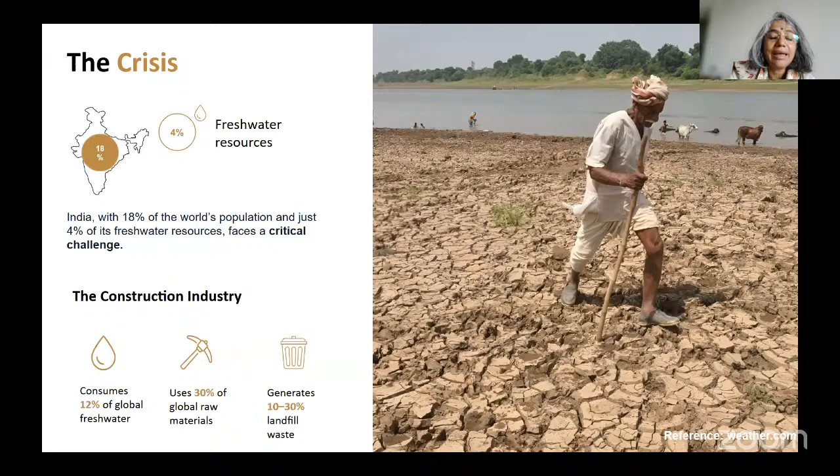So this was the scenario under which the entries were called for under the Design and Build grants. This whole project was put together where we've identified 5 grantees who are going to actually execute projects. You'll be happy to know that some of them are colleges of architecture who will actually use this project to also teach and learn. We also have the mentorship program where we've got requests from these mentors to be guided on certain specific aspects of sustainability. And that's the journey we are really kicking off today.

The grantees are receiving, for the D&B grants, between 70,000 to a lakh of rupees, which is not really too much when you look at the larger problem, but this could be a seed to bring about larger change. It could be that block from which they can leap forward to do much more.

CoolAnt architect Monish Siripurapu was the second juror. I wouldn't call them jury really, it was an interview panel, a conversation that we had with the applicants to understand their intent, their ability, and to execute the project. Monish and his studio are known for their quirky innovations in the field of sustainability, and that's the need of the hour, to understand how we did things and how we can do things today. Also, Sumit, who's the head of CSR at Mphasis F1 Foundation, joined the panel.

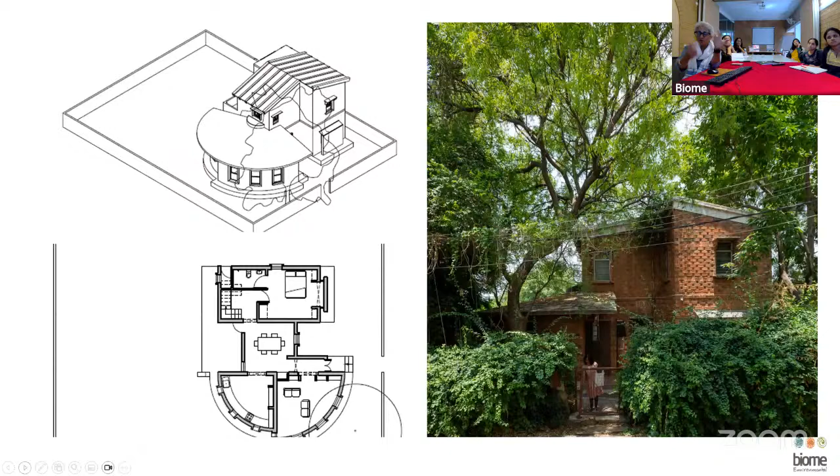So these were most of the homes. You use the rat trap bond, but then fill up the space in between to make this red and white checkerboard, like what we see mostly in Kerala architecture, but more for getting skylights within, because that's how the light comes. Filler slab - well, the tiles were replaced with waste, whatever was available.

So all the time we are also looking at waste in the building process, as well as whether the building can be a waste sink. Arches replace beams - as much arches as possible, as little concrete, as little steel in the design.

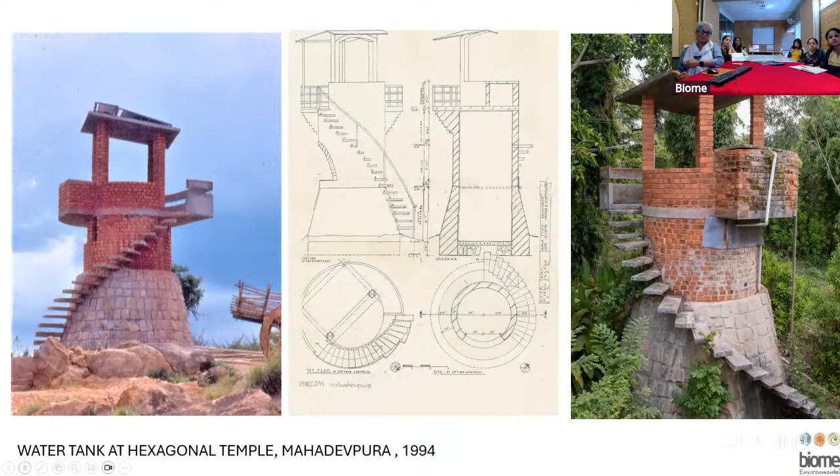Onto this is a water tank, again done sometime in the 1990s, and when we go and look at it in 2022, it's still there. This is for a farm - a tank below for the garden and agriculture purpose, a tank above to provide for a little building on the side, with solar panels at that time itself, which were working to lift up the water so that you get it by gravity into the building next door.

I just love the drawing, handmade drawings. There was no generator, so we couldn't have done anything with the railings. At that time there was no railing, and even now they haven't added a railing to the staircase.

Sanssouci is our home, which we built in 1995. That's one of the first buildings we did with earth sourced from the site. And it became what we call a lab of ideas because we did a lot of experimentation.

What we'd like to bring forth here is that, as such, concrete, exposed brick, plaster surfaces, you had something to refer to as good architecture, as something which is available, you learn from it. But when we started, we didn't have that.

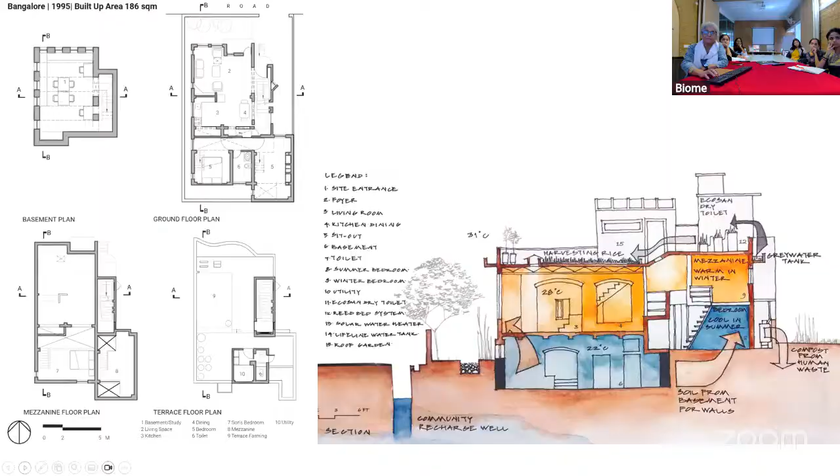That's our basement. Doesn't have the best of light, and also I would say sometimes the ventilation. And we combined it with a mezzanine, so the sleeping spaces are for cool nights.

But in 2008, we decided to move from being a proprietary firm to a private limited. And so people who were there at that time for a long time working with us became shareholders in the office. And since we were working by 2008 a lot on water, and in all our designs water and sanitation was an integral part of the design, we decided no longer should we be calling ourselves by somebody's name. And Biome fits the bill in terms of the name.

And the practice is rooted in Bangalore and its contingencies. It's much better weather-wise, but there are lots of challenges, and those challenges are our opportunities for design. So it revolves around these three contingencies: resources to build with, water, and sanitation.

And how did this come about? Resources to build with - okay, you've checked it by making a basement and getting the earth, or somehow or other get the earth and you build with that, because Bangalore soil is extremely amenable to building with earth because it has less clay.

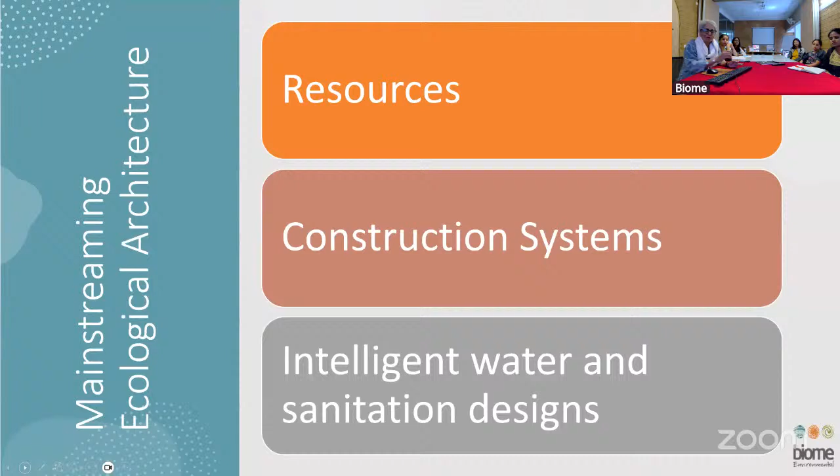So we were always interested that let's mainstream it. It required that we decide on what kind of resources we need, the construction systems, learning much from the Indian Institute of Science in Bangalore about construction, and then design for water and sanitation.

So the resources - these are the three resources we're looking at. You all largely know us that when we build with earth, we work with a lot of waste too, but we've also built with concrete and laterite, though very few. Maybe we've done about 1,000 projects, so maybe 2 are all concrete, and maybe 3 are all laterite.

So contextual application - what is right. Basically nothing is wrong, but how do you use a certain material in a certain context? So I'll show some examples of it.

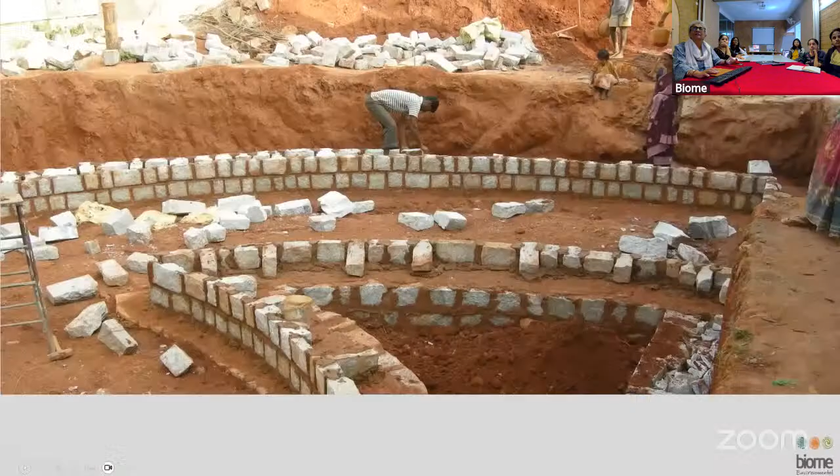So when you're looking at earth as a material, for us it's either a basement, or in larger projects, look at the water reservoirs. So basements are like this. Here in Bangalore, we use stone, granite stone with stabilized mortar.

Stabilized mortar is mortar which has a bit of cement, basically earth and quarry dust, with about 5 to 8% cement. This is so much better than cement and sand mortar, because it retains the moisture. So the curing required is less, and the cement gains strength slowly and in a better way, and doesn't get honeycombs.

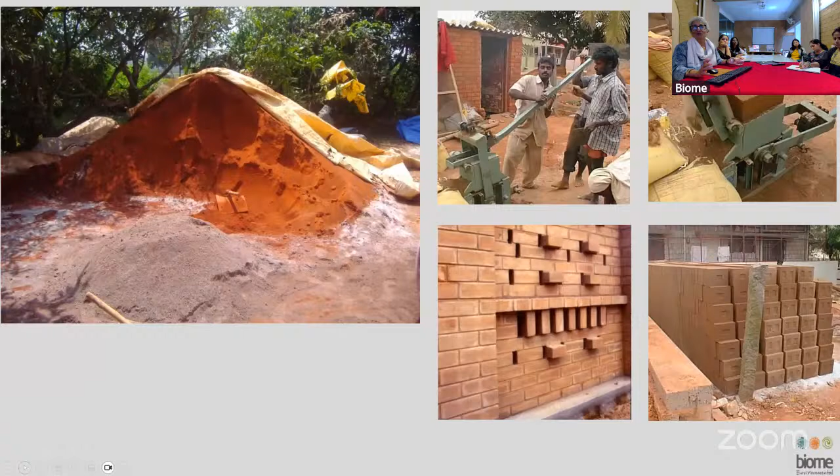So this is the kind of soil which we get in Bangalore. I'm always looking at it—wherever we go, we're looking at soil. What is it like? What is the characteristic of it? It's mixed with quarry dust, and the percentage of cement is decided by how big the building is.

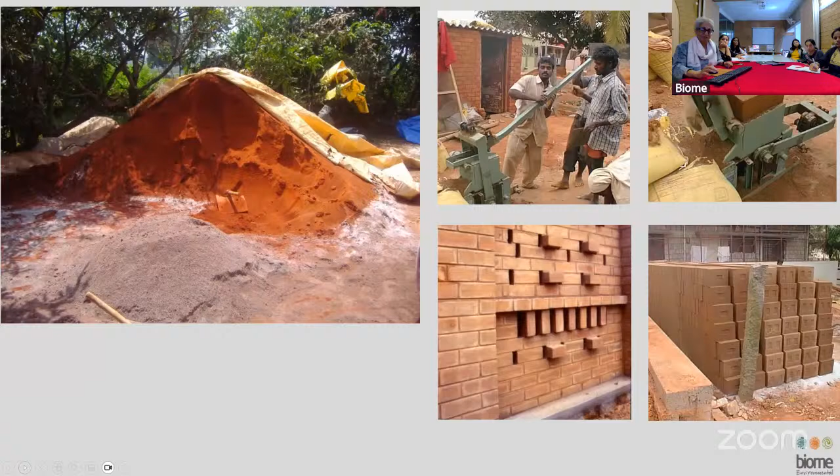Pressed at the side, human labor, and the block comes out, cured in the sun, and that's it—that's how the walls are made. And then the whole building itself is looked at as an ecosystem.

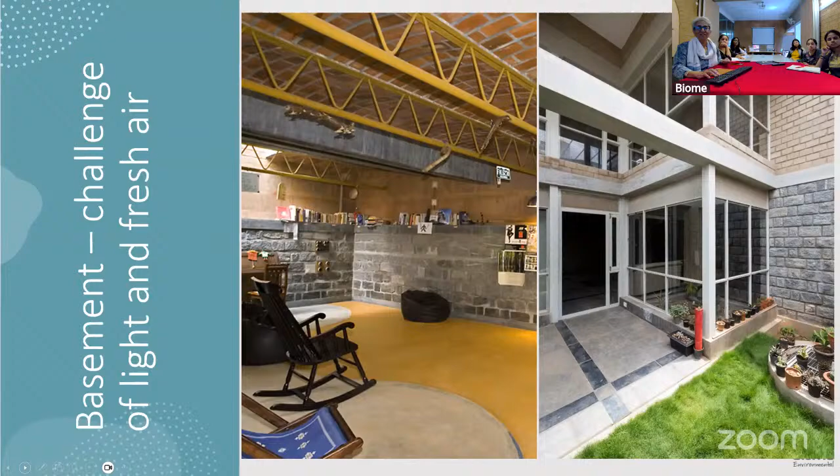So the basement became better. They started having skylights and even a garden, a well in this case. So better air, better light, and more earth. And they get used for many different purposes. One of them is, I have about 3 projects where they are dance studios.

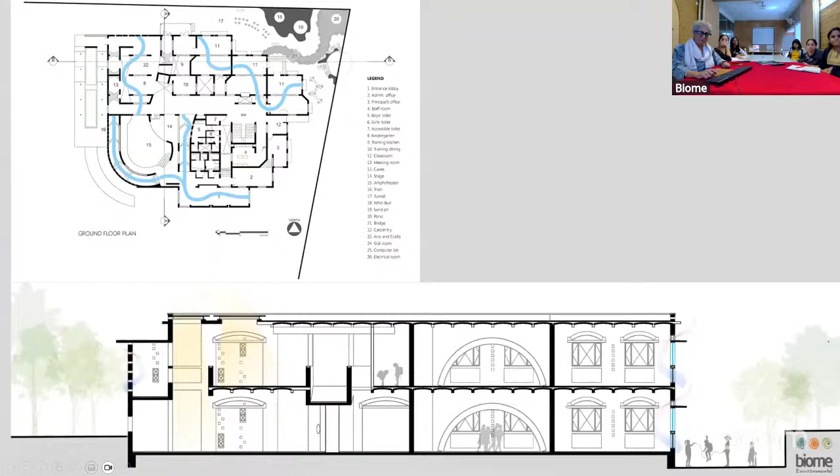In this school in Coimbatore, it's what I call the mother of all basements. The school itself goes down by 1.5 meters. You see it in this—there's a road here on the left, and even the playground is 1.5 meters below. The bylaws do not allow making basements in a school, so why not make the ground itself underground, so the classrooms don't become basements.

And we get a lot of earth then, to build the whole school of about 18,000 square feet, the compound walls, even for the next phase blocks were available.

Mind you, it doesn't take too long because while the blocks are being made, there are parallel processes happening—the blocks are made while the foundation is on. In this case, we also used a precast system of roofing, so the roof is being made while the walls are coming up. This whole school of 20,000 square feet was finished in 8 months.

And with lots of fun spaces inside. Again, with respect to the climate, the inside is also a play space—so they're not merely passages, they're more than passages. Classrooms are designed for light, which is above, and children sit on the floor, so air passes over the body—jalis below.

In a larger project, which was about 3 lakh square feet of construction in 80 acres of land, it was not only that we had to build. While in this 80 acres earlier there were about 35 to 40 people staying, with the students when they come to the school, about 300—this would accommodate 3,000, and now it accommodates 3,000 people every weekend.

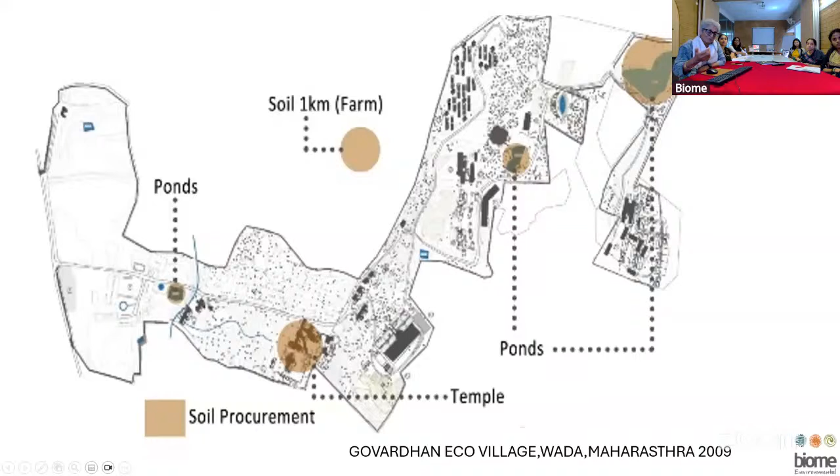So we did a hydrogeological study and made ponds, and they became the resource—they became the quarries for the soil to be used. That's about a 100 feet by 100 feet pond, which is in fact a recharge structure. So the rainwater coming down from the hills comes to the pond and recharges the ground.

Through the hydrogeological mapping, we also noticed where we could get the discharge, and we have a well there from where water is collected and used for all drinking and cooking purposes. This is the building—this is a picture taken after 11 years. This is near Mumbai, a place called Palghar.

Composite climate—it rains about 3 to 4,000 mm in 3 months, so the design had to really take care of the walls. And then it's hot, it goes up to 45 degrees centigrade. The winters are moderate, going down to maybe 8 degrees. Everything had to be accounted for.

So we created these rooms which will have a terrace, which are roofed, which are used for daytime usages. This is for ISKCON, so bhajan, meeting with any of the saints—all that happens at the terraces. And you don't even use the fan during the daytime.

Now this becomes designed by law. Even when they try to design by themselves, they never put a terrace. They went for a terrace and realized that you cannot manage the rains with an open terrace, so it's best that you cover the terrace. So now every building they do is in this manner, and you get an extra space for use.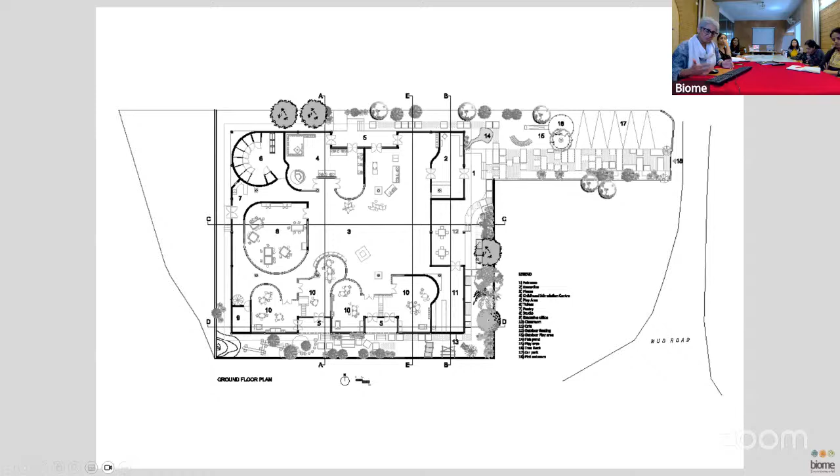This project, Atelier, the school, when they came to us, they had the land only for 5 years as lease. So we discussed with them and decided we should make a building which you can take apart and none of it will be wasted.

To retain the earth within the plinth, we've used what we get in Bangalore as stone chapri, so it retains it. External facade is made of glass, wood, aluminium, and earth blocks. Internally, everything is MS structures. It's a false ceiling of bamboo and roofing of GI.

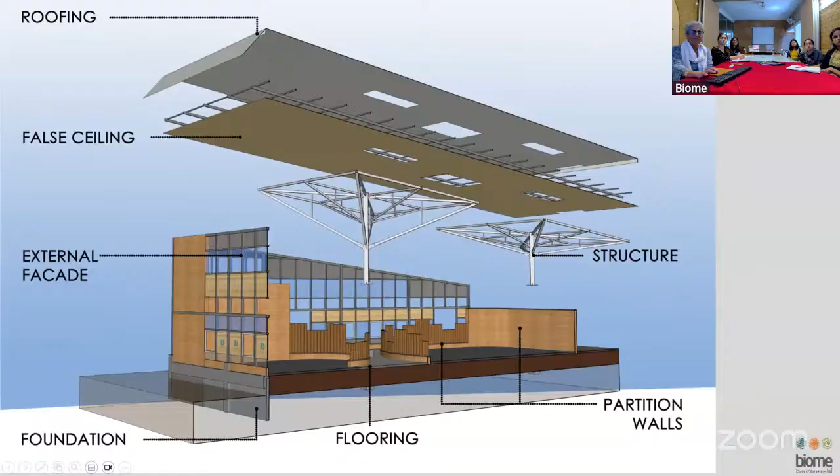Everything can be taken apart and reused completely, including the flooring, which is paver blocks on corridors. So you can even remove the flooring. Nothing gets wasted in this whole building when the use is over. It's about 20 years now, they're still using the building, so whenever the lease expires.

To go further with the idea of waste, we used repurposed rubber wood for all the furniture and some of the other wooden shelvings and staircase, but the rest of it was paper. Paper as divisions for walls, paper for furniture.

So the waste is not merely the building's waste. When we occupy, we generate waste. And I think we really love to look at this aspect in our designs.

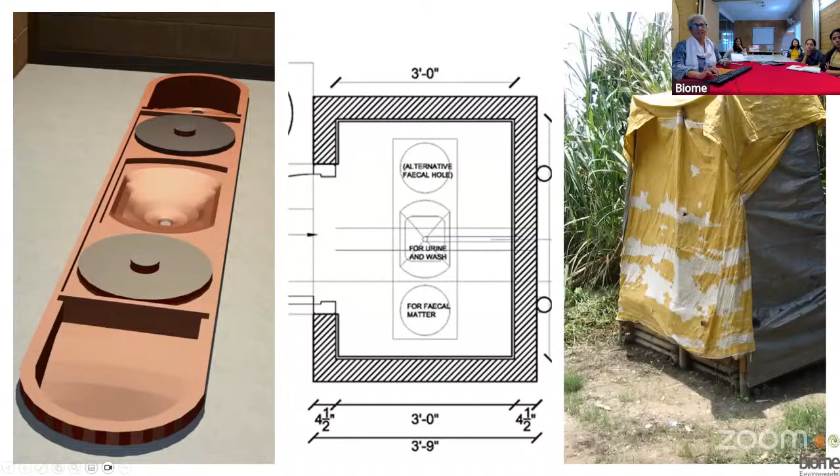And so we have the glory of having designed a WC pan for Indians. This is in use in Kosi villages in Bihar, where Kosi floods a lot and you need a toilet which is not sitting in the ground and which is not throwing its waste into the ground, so that it doesn't go into the water. So now in Bihar and Jharkhand, they call this toilet Phaydemand Shauchalay, which means it is a profitable toilet.

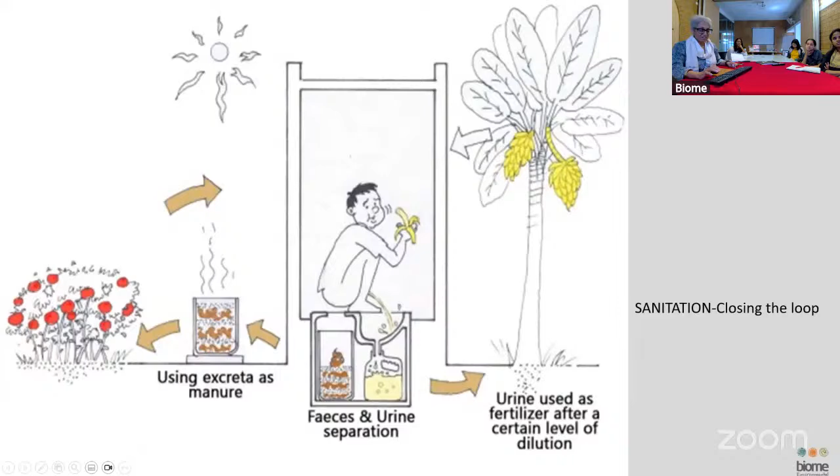So this is what we do. We just separate the waste which is coming from human beings and use it for fertilizer and as soil.

This is a project the clients call Eco House, for a professor from Stockholm Environment Institute and director of Karnataka Pollution Control Board. So the whole idea is how do we close the loop. The blue column which you're seeing are various kinds of toilets and kitchen where black and gray water will be produced.

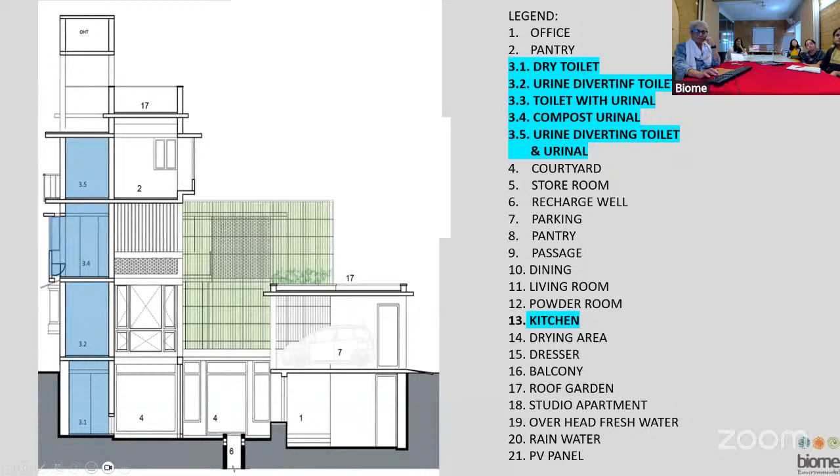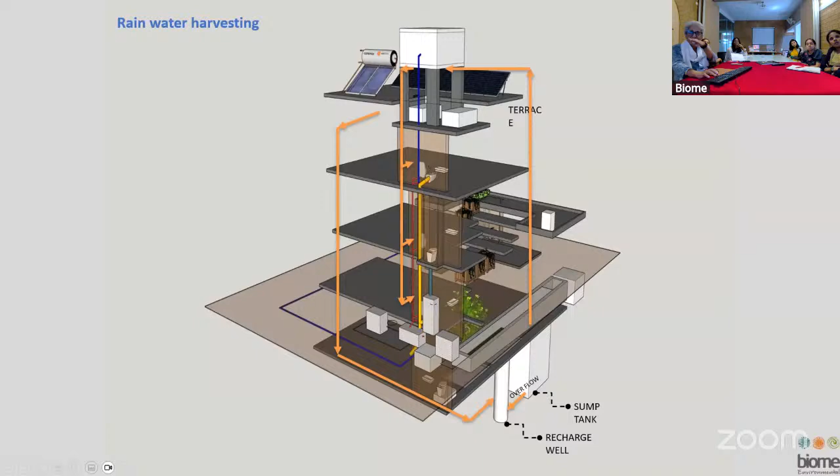So the whole drawing and the interaction with the client was on how are we going to put all the various pipes and other systems. He was bringing some systems from Sweden too. So it starts with rainwater harvesting, and it goes into the underground tank and then goes to the recharge well.

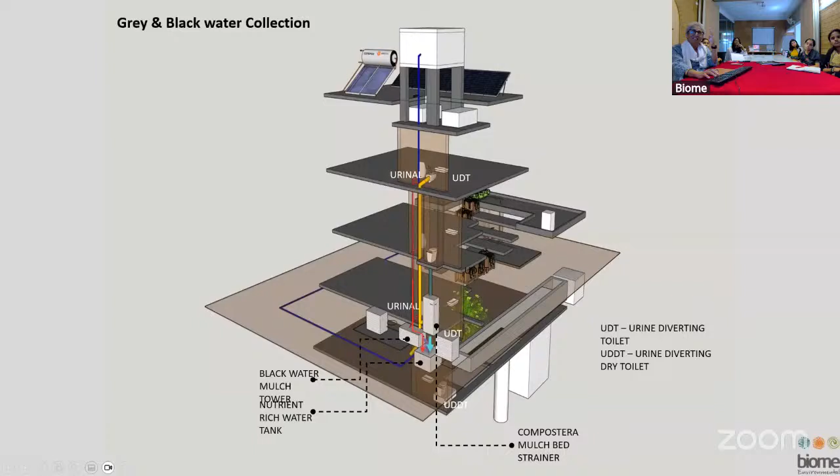Then you look at how do you treat the grey water, various systems for that. Then the grey and black water collection, there's mulch, and the whole of it is now covered with green, growing food within the place. We had an underground space and we got the earth from there for the construction of the building, and the basement is used as an office.

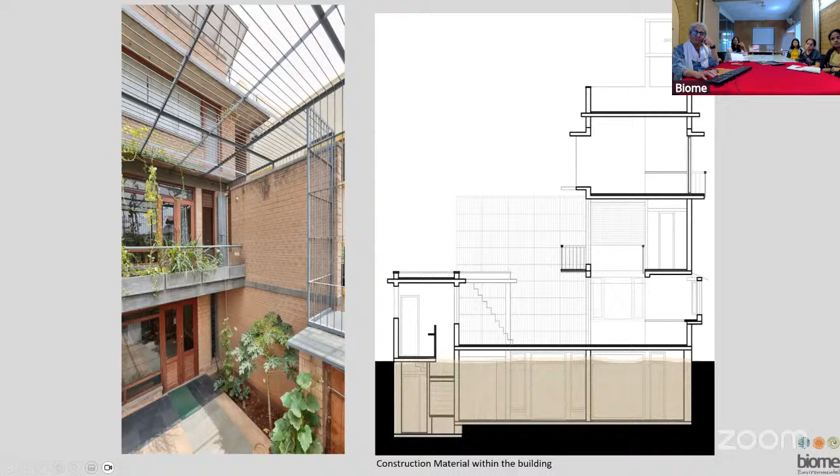Contextually, we're agile. This is in Coorg. The locals know how to build with laterite. First of all, getting the soil is difficult. Making the blocks will be very difficult because you have to have flat land. This was part of the building which was existing - we broke it down and got some of the laterite blocks from there and then added. So it's built with laterite, but has the courtyard so as to allow for light and ventilation well within.

Or this is in steep lands in Coonoor. It is impossible to think of building with earth. Tamil Nadu doesn't even allow you to transport earth from one place to another. Again, with almost 35, 40 degree slopes, it was difficult to have flat land available to make earth blocks or store. So it was easier to build with concrete.

But then how do you design so that it's not just merely a concrete block? What we had to work most on was how do we reduce digging into the soil, because that will contribute to landslides. So in the building, at the bottom is a foundation plus a sump tank.

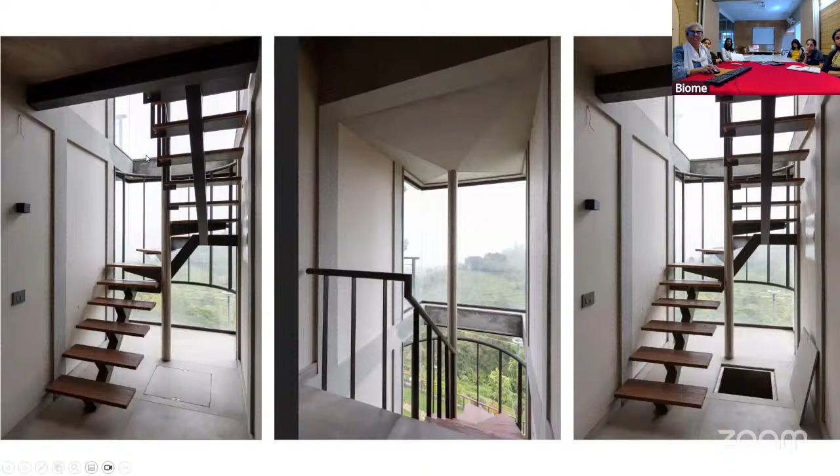Even more interesting is the sump tank is at the floor level, you can see it here, it's at this level. This opens up, and that's where the pipe brings the rainwater down. The roof is sloped in such a manner that all the rainwater comes through this and goes into the sump tank.

And you keep the interiors to a bare minimum. You show the concrete as it is. It's a beautiful interior done by Kavita Kohli of K2 from Delhi.

You manage the water in the land to create spaces.

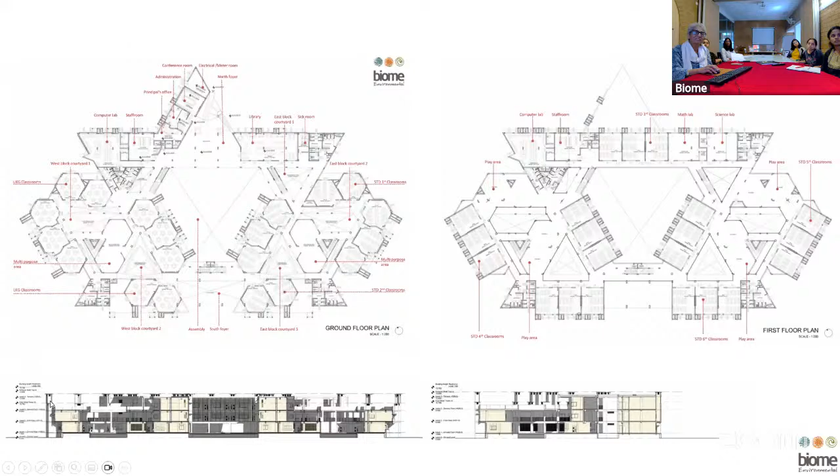What happens when you have to build in a very hot area? This is near Hampi in Toranagallu, a school for JSW. The air quality is not very good because this school is next to the steel plant. So what we decided, my colleague Sharad decided, was that we'll take better quality air from higher levels. So we have vents that created stack effects, giving both inward and outward going air through these stacks.

They're not as tall as ideally they should be, but our colleagues designed it so that they will work. We painted them black. On top, we really wanted everything, the exhaust, to be black, but the colors the school chose are different. So I love to show it in black and white so you can see how it should be.

Now we have better quality air and cooler air within, and this is interspersed with lots of small shaded courtyards. Further, it's also important that we make drawings right.

This is again a plot in Tadoba, which used to get flooded. The idea was to raise up the buildings and the pathways where we're going to build, but not allow the water to go and flood the neighboring fields. So we have to embrace the water. We created a large pond where all the water in the rainy season comes. We got the earth to build, and we are not adding to the woes of the neighboring plots.

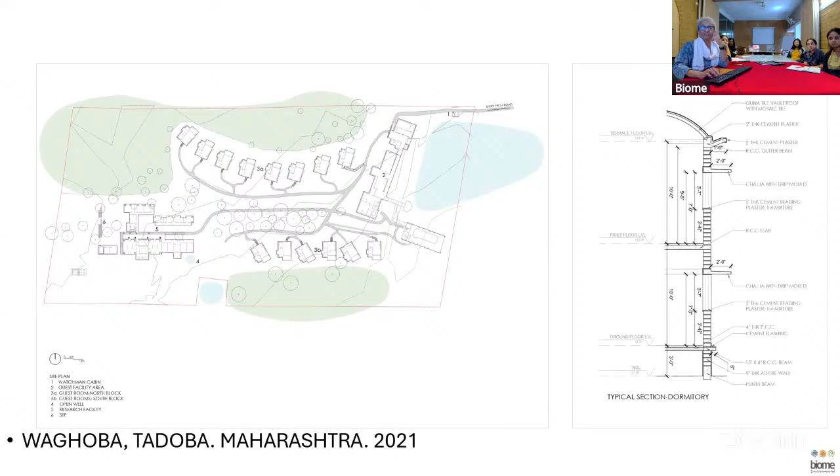We make drawings in a way that anybody can read and build, because we're not always working with highly trained contractors. We're working with locals, so it's important that the drawings speak. This is the resort, the water body.

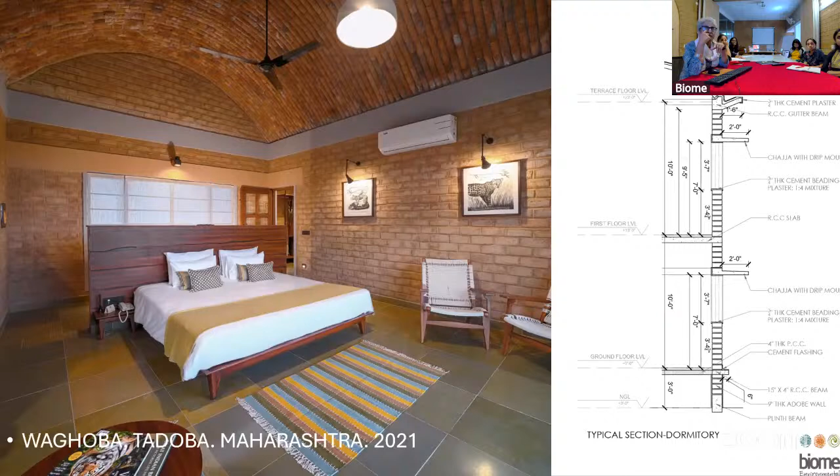And that's how it's built inside, with adobe and stone. The roof is with Guna tiles from Center for Science and Villages. So also in India, there are lots of small institutes which have been working for a long time on different ideas, and it's nice to collaborate and work with them.

But what is the construction system? One thing is to just be at the site, learn, and also train. So this is an exchange. And research again at the site to find out what different materials are possible.

So like in Bhopal, where it's black cotton soil, we get the soil tested, go to various places, and then we found somebody who's making fly ash blocks that he was ready to make, combining earth, fly ash, sand, and cement into blocks. So you have to do a lot of research, a lot of legwork is required.

How do you make site drawings that make it possible to execute at the site without you being there? We've been developing software. We do our own estimates because these are construction systems which were not there earlier, so we don't have CPWD or PWD rates.

And then, like I said earlier, we really like to keep control on costs, so monitoring is essential. The office has between 2 to 3 quantity surveyors working in the office, or we also link to them.

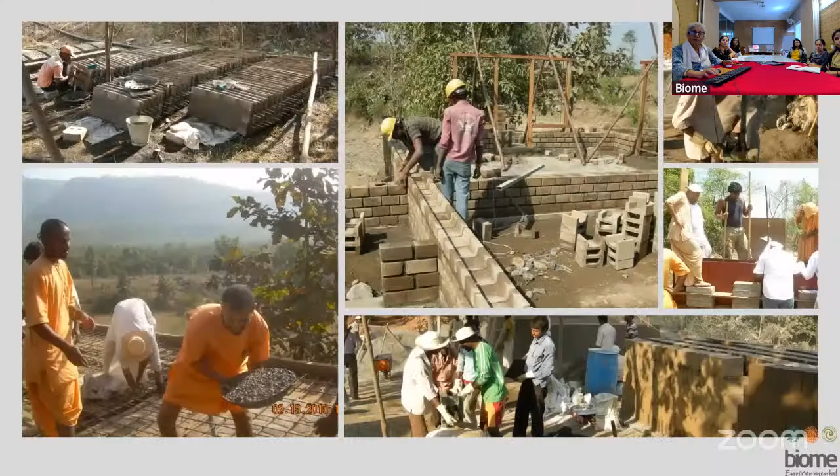This is pictures at Govardhan Eco Village in Palghar, where we used earth for everything, including the roofing panels, because we had so much earth. And this is an earthquake-prone region, so creating even sill bands, being at the site, working with the devotees as well as with workers, training them.

But also we took for the first building a team from Bangalore, because the idea was that the first building has to be very good. People should like it and they should be building more and learning from it.

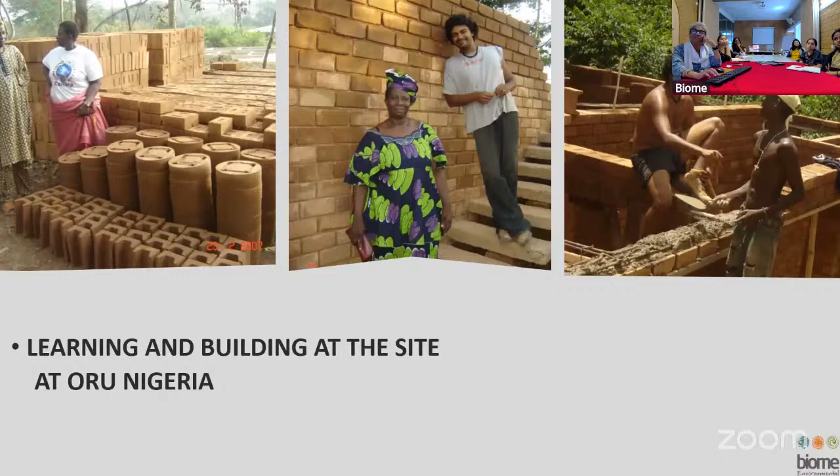You have to really do the drawings well, where you know exactly that when you do the 19th course, that's where the lintel has to come, so it doesn't move here and there. You give them that, and that's it. You do a good drawing, and the masons are able to follow through.

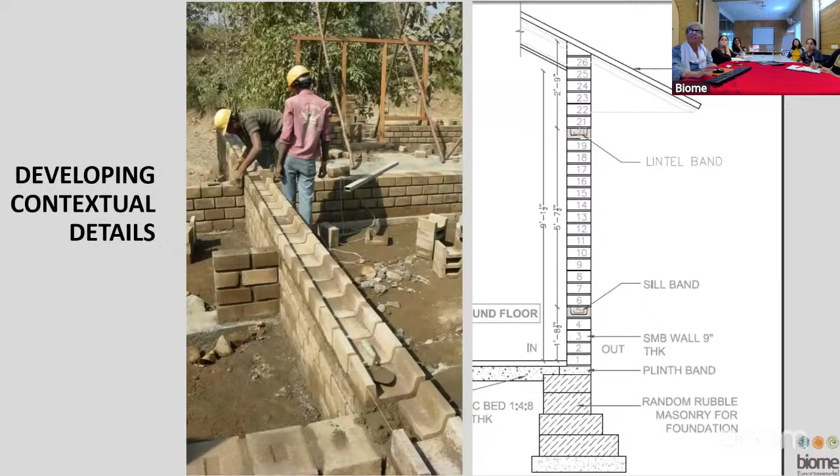Sometimes it's just a small addition. This is in Madhya Pradesh, an addition of a room in a homestay. This is Madhya Pradesh Tourism Board's initiative for tourism, so that you would have a nice room and a toilet, and urban dwellers can stay with the villagers.

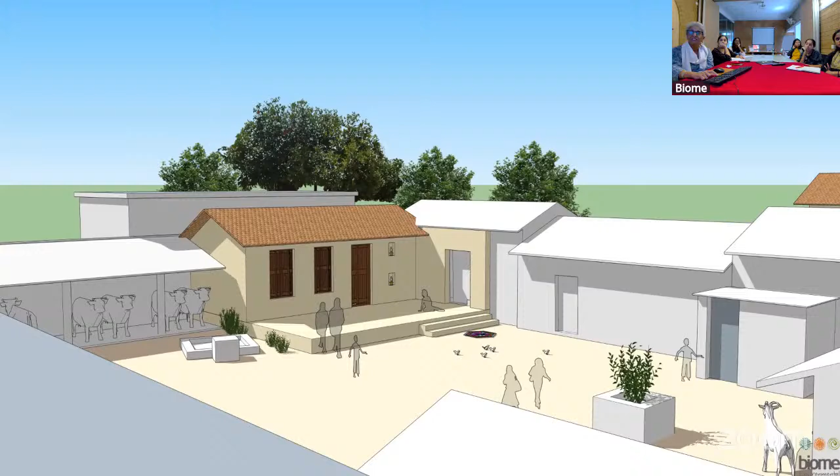You make the drawings in the local language. Till now we've done mostly drawings in Devanagari, because we haven't had the chance in other places where they needed Tamil or Malayalam. Here it is.

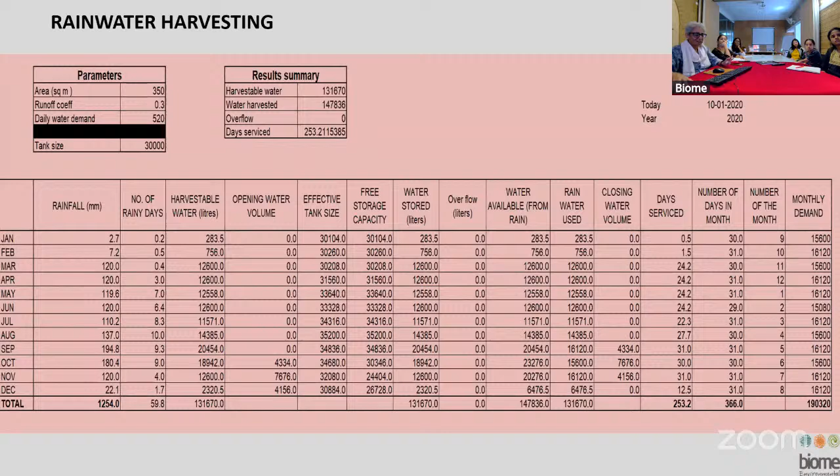We've worked out rates through rate analysis. The quantification is done in the office, and through the project there is always monitoring. The bills happen, and we get to know where it's going up or down. We've also made our own software to calculate the capacity of treated water and the capacity of the tank. You put in the lat-long of the place, how many people, etc., and it gives you the optimum storage capacity. So you don't just build something out of your mind, but it is always worked out.

Contextual details of treating the grey water. This is part of the terrace design, where grey water is treated on the terrace. We make our own ferrocement tanks to put the planted filter bed, because our sites are small, so this treatment cannot happen on the ground. The terrace is a place where we get the maximum sun, so it's the best place to grow and treat wastewater, because the plants need the sun and good air.

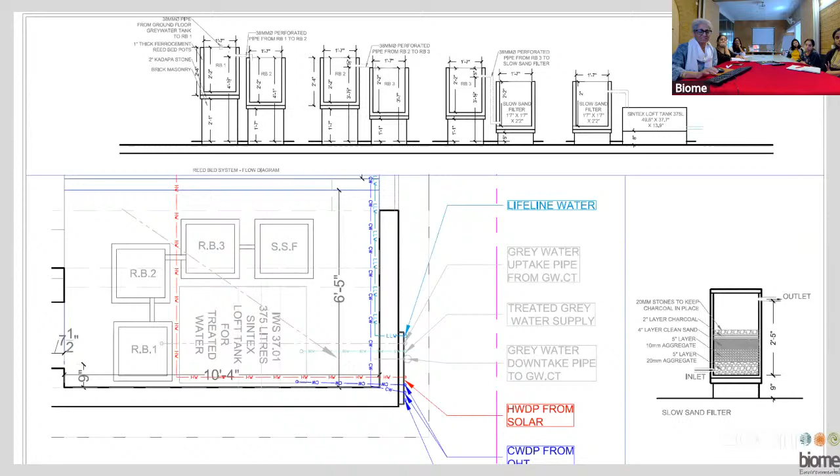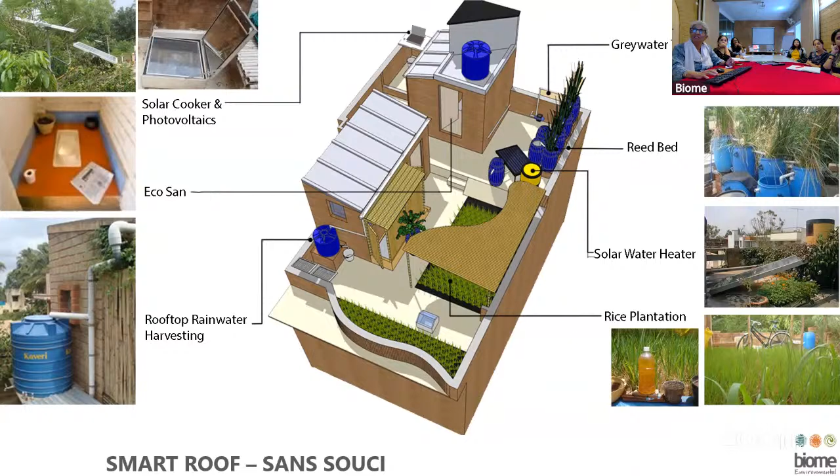So we call this a smart roof, where everything needed for you to function within the house is taken care of on your terrace. You treat your wastewater through the grey water treatment. You have an eco-san toilet, so you get fertilizer and you grow your rice or vegetables. You get your soil as well as your fertilizer. You collect drinking water, which we call lifeline water, from the cleanest of the roofs. And obviously it would have everything to do with solar, whether solar photovoltaic, solar cooking, or solar water heating. We call this a smart roof.

That's the rice growing on the terrace, rice being harvested. This is how a terrace is properly designed in the office.

And we hope our cities would become ecosystems and not villains. So that's the office now, from 1 to 30 odd. And that's it. Thank you.

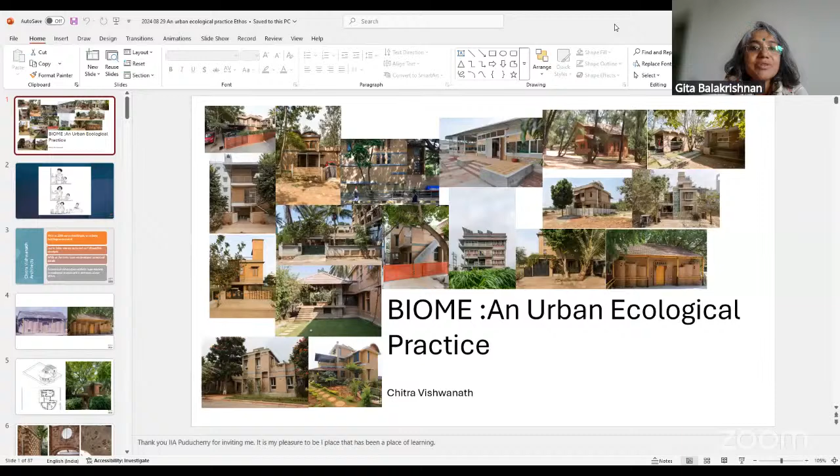Thanks, Chitra. That was quite revealing, I think, for many who haven't really seen this space of ecological design, and who are kind of finding their way around. It's interesting. It took me back in time where you were talking about Guna tiles and local technology that needs to also be looked at by many. Guna is just one example you gave. There are so many that people could integrate into their ways of building. We'll talk more on a lot of questions that I have, and I'm sure others will have as well.

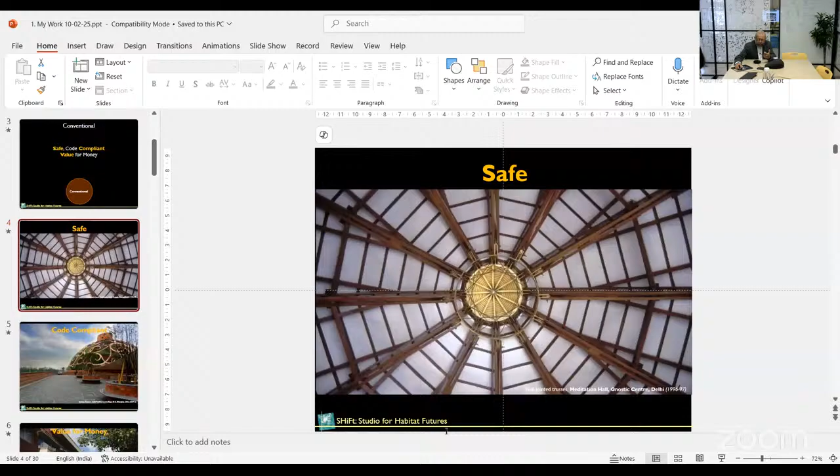Okay, so safety is an interesting thing. When I designed this truss, 12 trusses meeting at the center of a meditation hall in the Gnostic Center, which is a Sri Aurobindo center near Delhi.

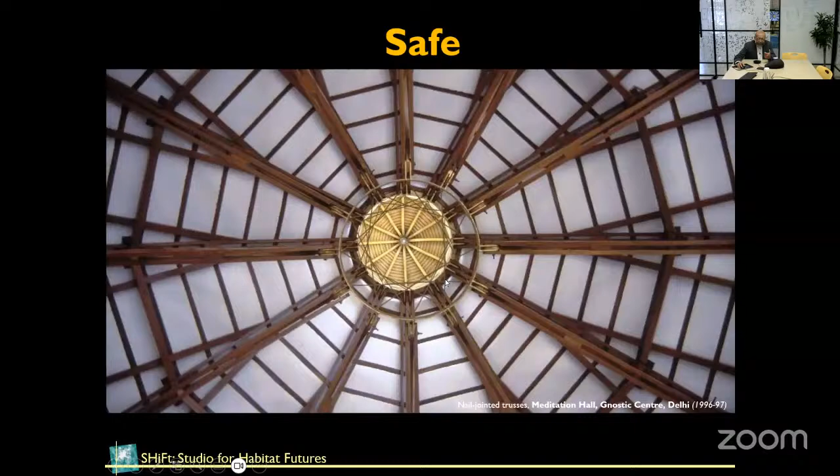I designed it completely by using a booklet published by the Forest Research Institute. Frankly, it was symmetrical because I could not handle the non-symmetry. So all 12 trusses met at a peak, and this was nail jointed timber trusses, meaning nails were put in alternating sequence, head first and tail first.

This was recently, after 20 years, renovated. The interesting thing is that with some ballies to hold up the roof, we managed to take down the truss, repair it, and put it back up again. So it shows that, like in Chitra's case, nothing got wasted. It was completely used.

Something similar happened in the Shanghai Pavilion that we did for the World Expo in 2010. Here we made the world's largest bamboo dome at that time, complete with herbs and medicinal plants on the roof.

Here, you can see my cursor? Yes, we can. Okay, so everything here that you see is not bedded in cement. For example, this flooring pattern is on sand.

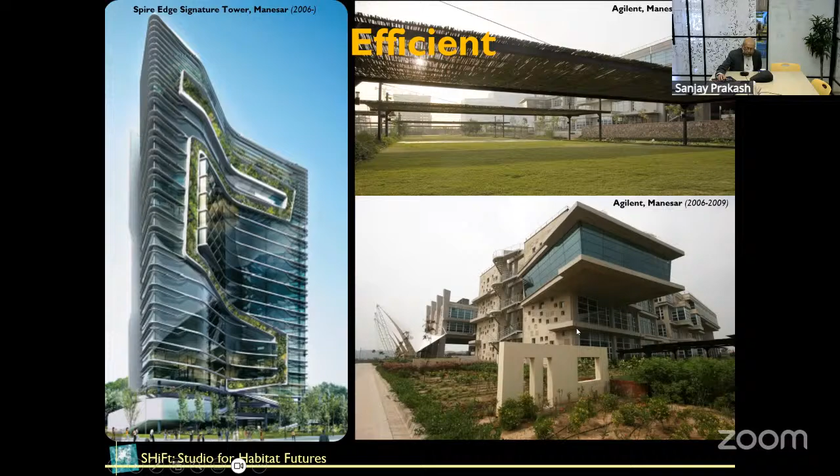And this is the bamboo dome from inside. You see the 40 trusses meeting at the middle. And on the right is the TZ housing in Bangalore, in Whitefield.

Okay, I was unfamiliar. I thought there was another picture appearing on the top left, which is blank.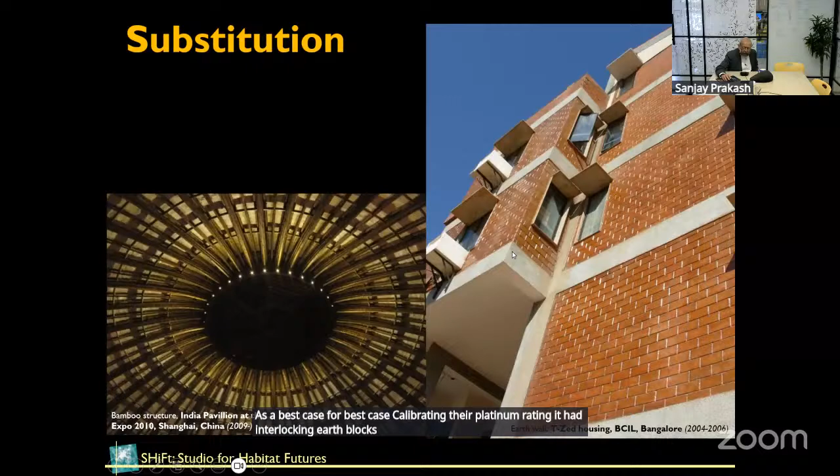So this project was used by IGBC as a test case for calibrating their platinum rating. It had interlocking earth blocks and mostly Silicon Valley returnees, and they were quite fond of it, and it's still being used even though it's now 20 years old.

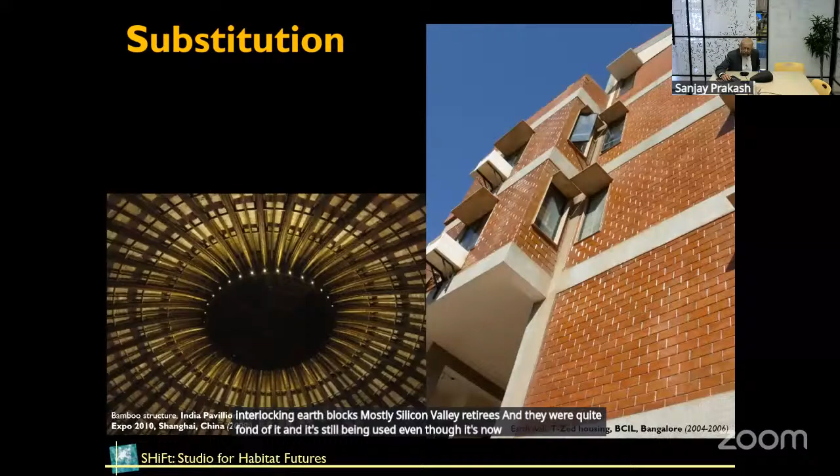This was 3 examples of substitution also, where this upper left house was Heine Muller's house in Pokhara, Nepal, and it was right on the epicenter of the earthquake. So 23 kilometers off Pokhara on the east, I think. And this withstood the earthquake well because it had hidden inside some steel and a lot of wood.

And this withstood the earthquake well. In fact, when the earthquake happened, I wrote to Heine and he replied after more than a week. And I was worrying what happened, because I was almost certain that the house would have broken down. But he answered that he was traveling and his wife was in the house. And now she is completely assured that it will definitely stand for another 100 years. So that was a good story.

Anyway, on the bottom left, you see Matighar, which was the compressed soil block building, which we did on the Central Vista. And on the right, you see something designed by Gernot Minke, the Pope of mud architecture in Germany. He designed this completely with unstabilized soil blocks because he wanted not to change the color.

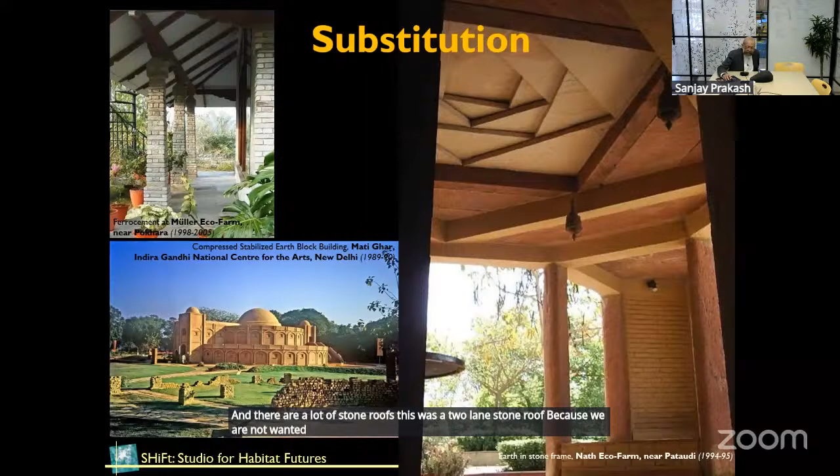And he designed this with a little bit of concrete. So there are some concrete beams and there are a lot of stone roofs. This was a 2-layered stone roof because Gernot wanted a certain ventilation system to be applied in this project. So this was the green aspect, and now there is sufficiency, which consists of 5 things. Sustainability, which I believe has not yet been addressed by either the LEED or GRIHA systems.

Sufficiency is one aspect, resilience is another, equity, identity, and carbon neutrality. Sufficiency basically asks the question: how much is enough? Is it enough to want 20 or 18 degrees and 16 degrees, and allow workers to sweat in the heat? Resilience consists of whether any project can withstand future shocks, such as heat waves, dust storms, or excessive rain. Equity, on the other hand, consists of: does someone get excluded?

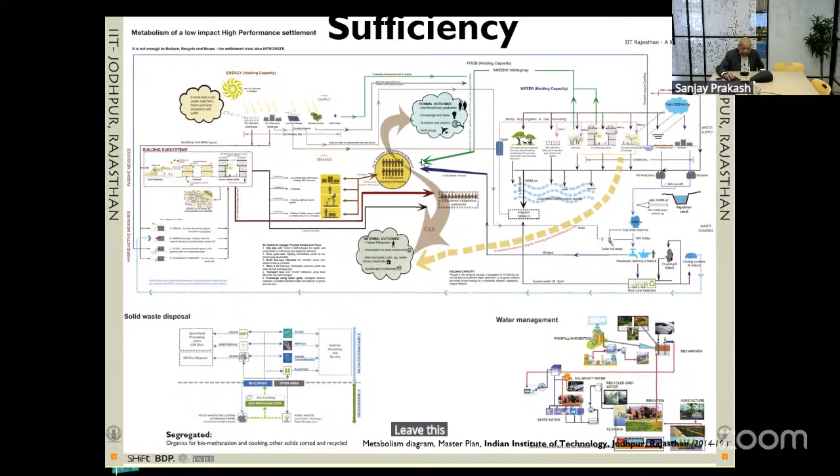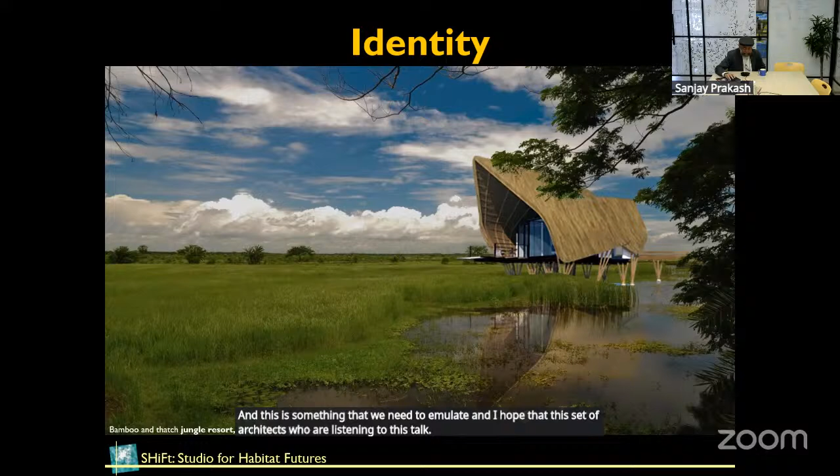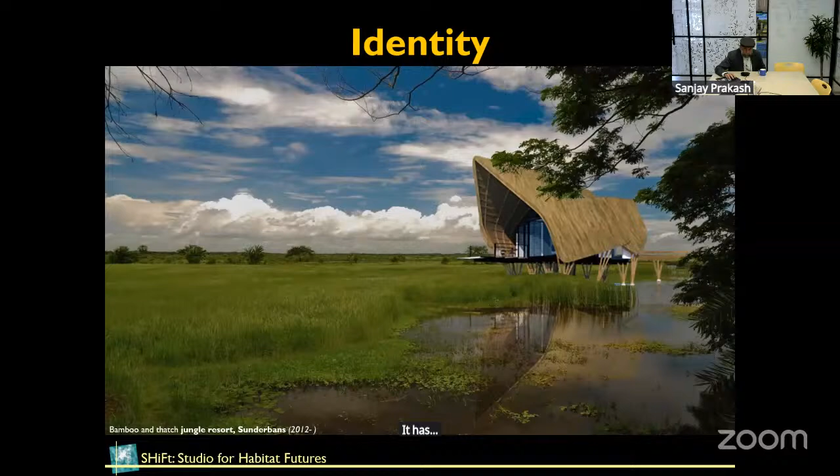And this is something that we need to emulate, and I hope that this set of young architects who are now listening to this talk will create architecture which is truly our own. There is no way that Dev.D or Oye Lucky Lucky Oye cannot be set in Delhi. It's completely set in Delhi. And this is a thatch hut, which this is a five-star hotel. It's in Sunderbans, so you see all the local flora and fauna.

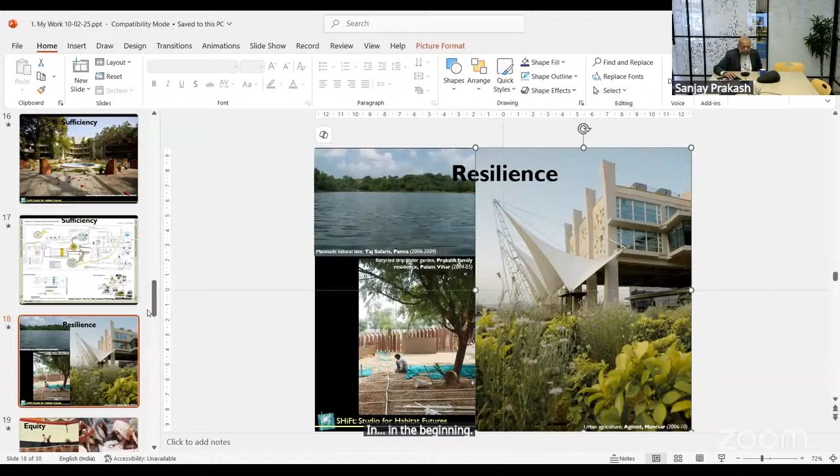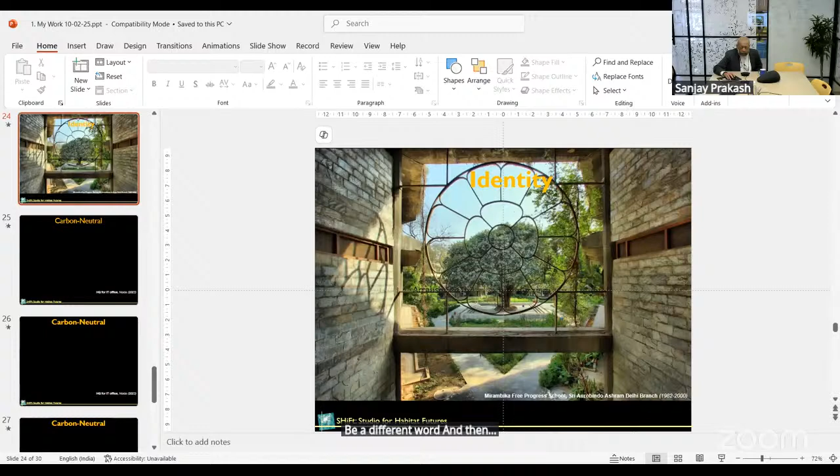I had some carbon neutral slides also, but this presentation doesn't have that. Because I feel that in order to be carbon neutral, one has to design with earth as a material. It's not just carbon neutral in operation, you have to be carbon neutral in the making of the building also. So it's okay to go with a lot of aluminium in the beginning, but my own feeling is that this will be a different world where we will end up being sustainable by being carbon neutral.

So that's it. Thank you, Sanjay.

I think there are a flurry of questions. I'll allow the mentees to first ask them and see if any college students after that have some, and reserve mine for later. But something that kept coming up during both your presentations was the fact that working in this manner takes time, takes effort, takes a lot of involvement. And I think what you generate out of this is what should be the motivation for young architects to walk or trot this path. Maybe you can dwell on that. And I was delighted to see in both your presentations the involvement of the communities and people who are going to be using that space, or even engaging with it at times on the outside. And I loved, Chitra, the local language, drawing in the vernacular, because that's something we've been taking up, getting colleges to start talking about it with students so that now they get sensitized and work on it.